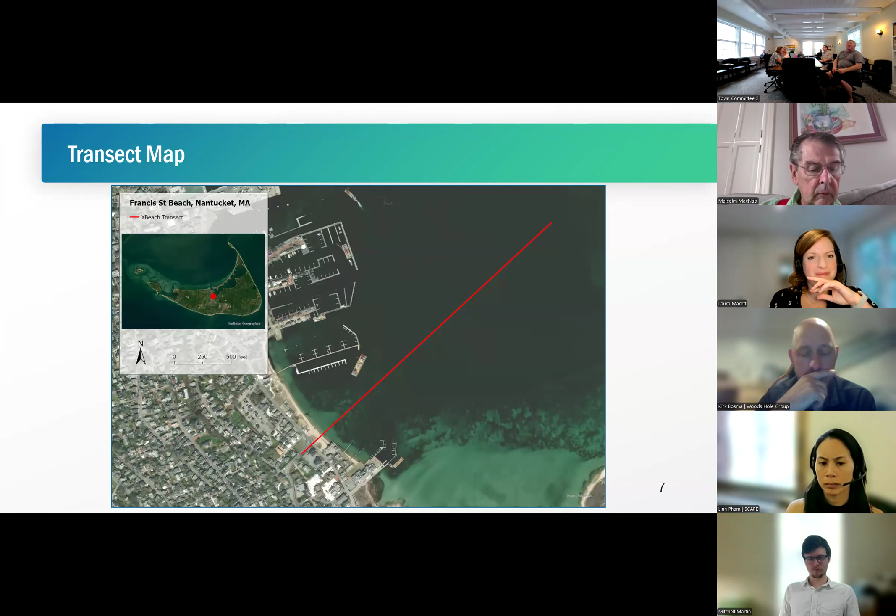To just talk about one of the things that Matt is saying, the scalloping within that part of the harbour, scalloping is closed. I think it's from Brant Point. I mean scouring. I meant scouring. I'm butchering the language. Worse than you. You're thinking of.

Worse than you, Vince. I'm sorry. All right. Okay, so this is supposed to animate, Laura, so we might have to switch over to me. Animated when I looked at it before. Oh, there we go. I just had to click.

Okay, yeah, great. All right, so this is what these kind of things look like. It's going slow, but the tides are going up and down. There's waves that are rolling in on top of this, which are a little harder to see at this scale. The top figure here is the existing conditions profile, so with no project in place; the bottom figure is with the project in place.

Along the horizontal axis is the cross-shore distance as you head off into the harbor to the right, and on the left, the backside, is Washington Street. This is a 2030 2-year storm event. Around simulation hour 100, you should have seen that the water level peaks and goes over the top of the existing conditions profile and floods the area behind it. And then in the proposed conditions, that's mitigated at this portion of the shoreline. So there you go. It just happened right there.

What this model also does, if you go to the next slide, is start to show what happens with the sand movement in this condition. There's a lot going on in these figures. Again, existing profile, no project in place, is the top. Project in place is the bottom figure. What you need to focus on is the initial layout of the profile, the black solid line there, and then the final profile, after the storm passes through, is the red profile.

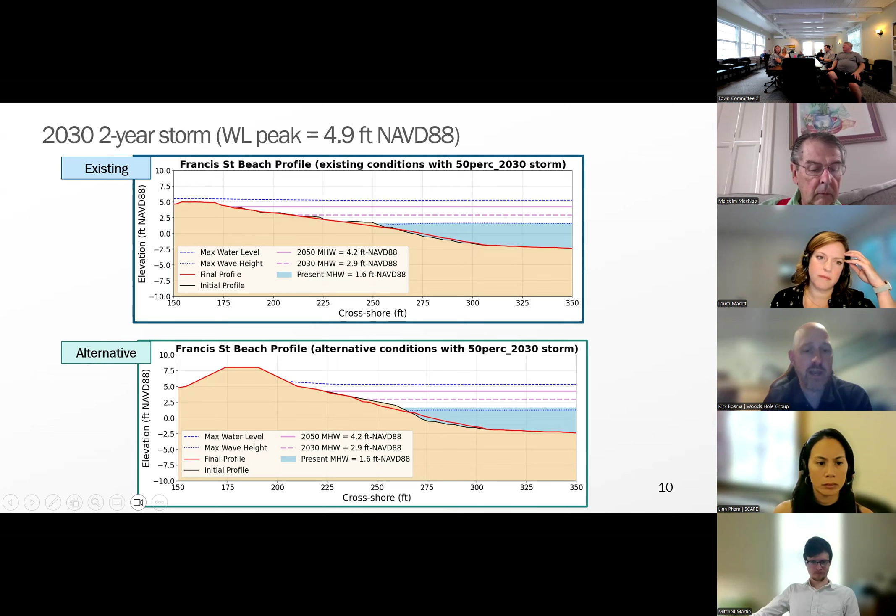The second thing you'll see, not necessarily in this storm event, is eventually sand that overwashes over the top and gets pushed back into the areas landward. We'll see that as we go through some of these bigger storm events. So you can go to the next slide. Now we're getting a little bit bigger here. This is a 10% storm in 2050, so a 10-year return period event.

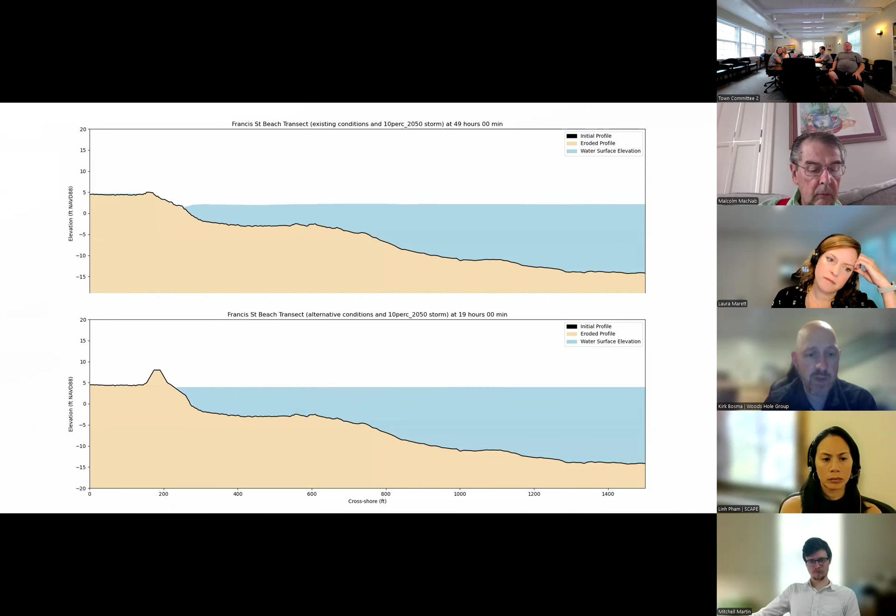And again, when we get to simulation hour 100 here coming up, you'll start to see the increases in water levels. And now what you saw there is you had overtopping of both the existing and the proposed scenario, right? Again, this isn't intended to necessarily mitigate against every storm event, but it's now flooding in both those cases. Next slide.

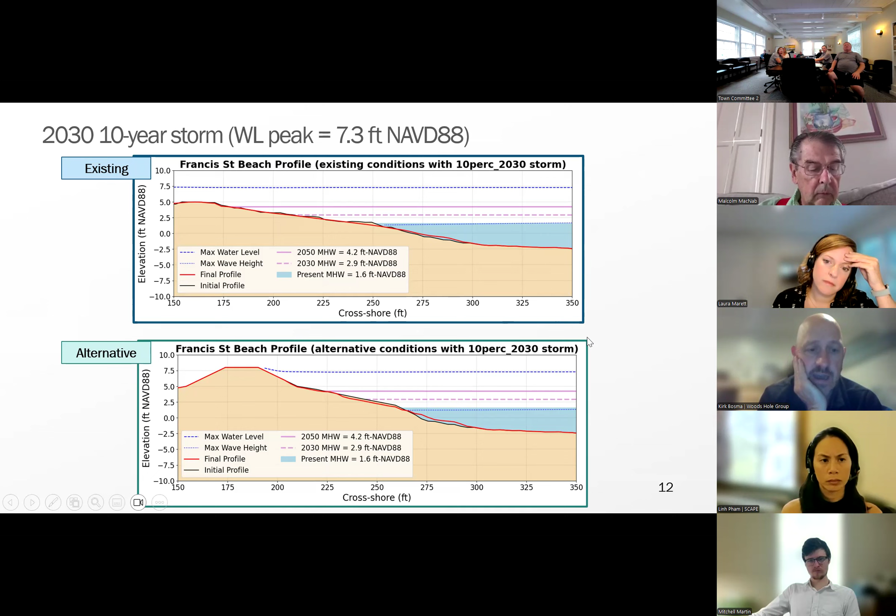And then we can start to unpack a little bit more what happens with the profile. Now, this is a relatively stable area, and we'll get back to that whole point of where sand moves alongshore and the scouring and all that kind of stuff. But generally, the existing or the proposed beach profile is really performing pretty well against these storm events. This is a 2030 storm event, sorry, not 2050. And it really is not eroding as much as you would think, which is actually a good thing. The next storm.

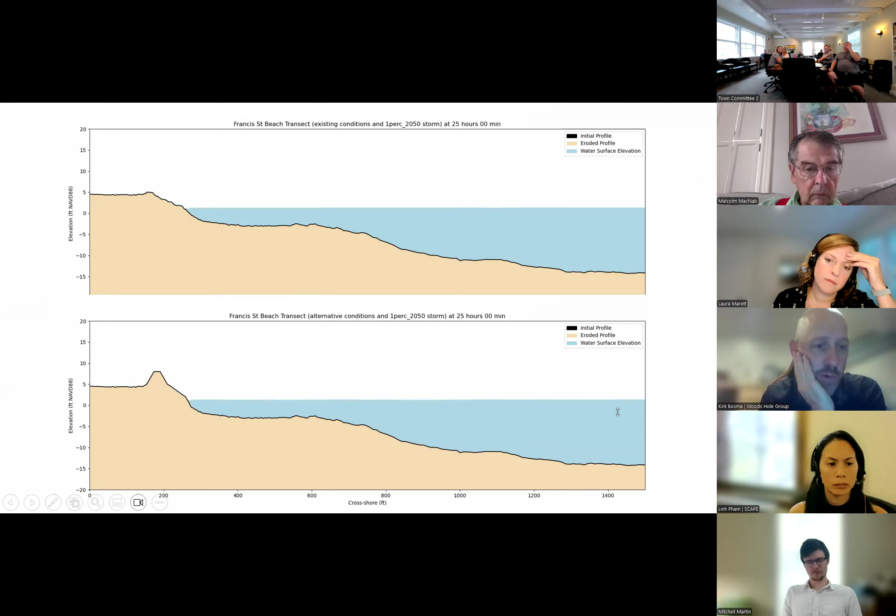And then here's a really, really big event. This is 2050, 100-year condition. This is the one that we really wanted to evaluate to see what was really going to happen with this profile. There's the passage of the event. You can see multiple tides cause problems and flooding on the existing profile there. In fact, if you look close, you can see standing water behind the dune under existing profiles of flooding. Next slide.

And so here's what we start to see, where you can actually see the sand built up behind under the existing profile there. It gets up over 5 feet. So we have over a foot of sand that's gotten pushed back into Washington Street and beyond in this scenario. The existing beach profile does start to chip into the dune a little bit more. But again, it's relatively stable due to the fact that we're not getting tremendous wave energy here.

And the design of the beach profile was such that we could try to break the wave energy before it gets to where the boardwalk infrastructure is. That doesn't mean that it's not flooding, right? So that blue dashed line you see at the top is the peak wave height, combined wave height water level. And that's getting over top of it, but we're not negatively damaging the dune itself that much because a lot of the energy is broken before it gets to that particular location, unlike existing conditions. Next slide.

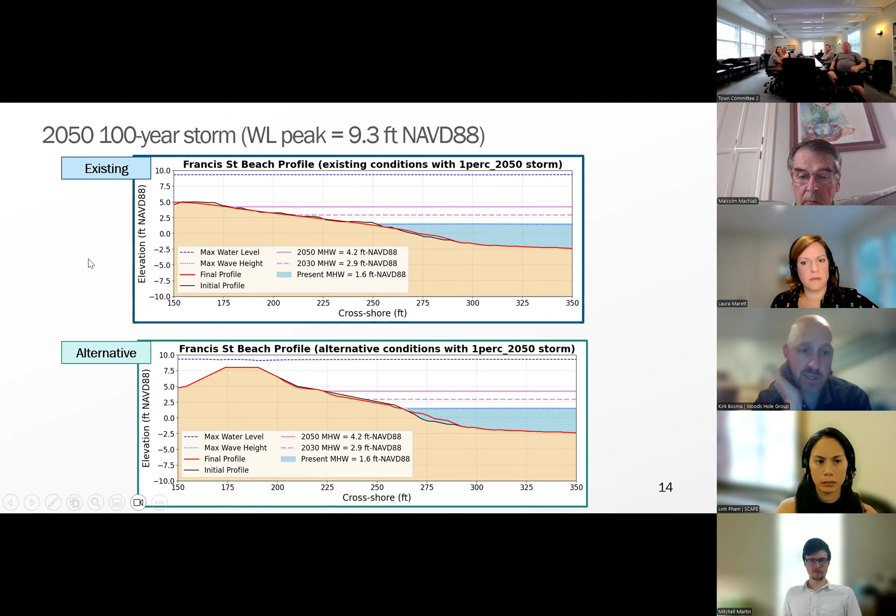So from this particular model, here's some of the key takeaways. And to go back to the question about what's happening, the figure that I'm showing here is long-term shoreline rates of change. And so black essentially means it's a really, really stable beach. Pink indicates very minor erosion, which is what's happening at Francis Street. Green indicates actually an accretion of value. So that means sand is building up there.

And then if you get into the darker reds and darker greens, that's where you have big change. So if you see a dark red, that's really significant erosion. You have major change in the shoreline and erosion happening in that location. So generally speaking, in Francis Street, we have some minor erosion, but it's not very significant. It's pretty mild. And then to the area just to the south with the harbor, we actually have a little bit of accretion in that area. So sand is getting pushed that way.

And generally, I would say because of the orientation of this, there's very little movement here. The wave energy isn't that strong on a day-to-day basis. But if you do get events, the sediment tends to diverge and get pushed both to the north and south out of the center. So that shape of the beach, which has that slight concave inward, is a good indication of how that sand moves in the longshore direction, meaning it's going to get pushed from the center, both out to the north and the south in this area.

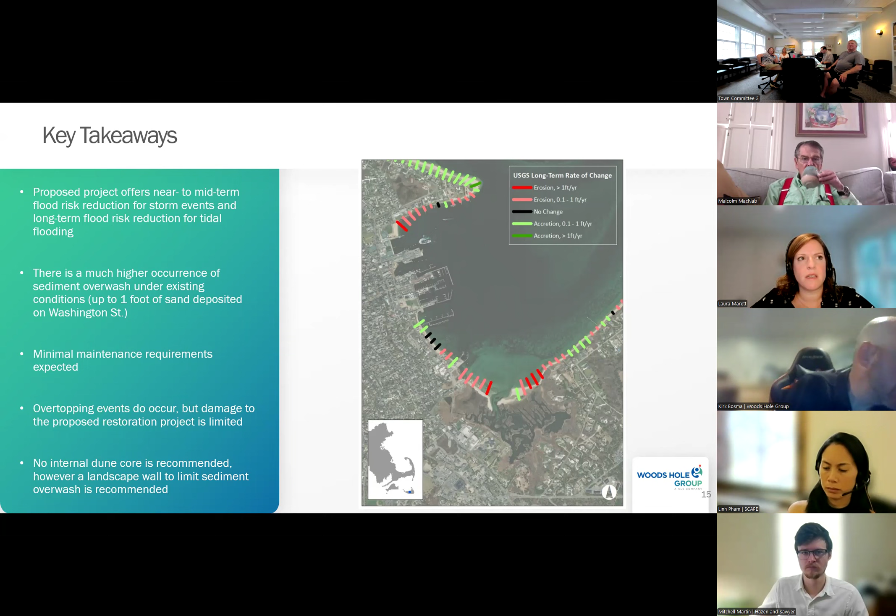I think in the public messaging, we can be really clear that, like, you're both right. Matt, we need to be clear that the water levels and the amount of flooding that we're seeing is changing. And this project is intended to address that while also creating a great space for people to access the water. But because we have seen these patterns of minimal erosion, we believe that the dune proposal will be successful and will withstand for a long time. So I think it's both.

Yeah, that's what I was going to say. It's really the difference between two processes, right? We have a stable beach setting in terms of the geomorphology, which means the way the sand moves and erosion occurs. But we have changing harbor and water level conditions on a regional scale that influence what's happening with flooding. And so there's change and not change, so to speak, in this whole project.

For the flooding models that you showed, when it does overtop the newly constructed dune, are you seeing a decrease in water depth on the other side? Yeah, so that's the second model, which is why I was trying to push through that before. Okay, sorry, Laura stopped us. Here's the second part, because they kind of go together. But just to real quick answer the other question.

The easterly winds. That's what produces all these events. That's pretty well known. That shows up in our bigger scale models like MCFRM. The real storms that produce problems at this location are due to those easterly winds. Whether it's driven by some cyclone type condition or just winds in general, nor'easters, that's all in that model. And that's how these storms really come into play. So yeah, it's a good point, and we've kind of vetted that out through this process. So that's in there.

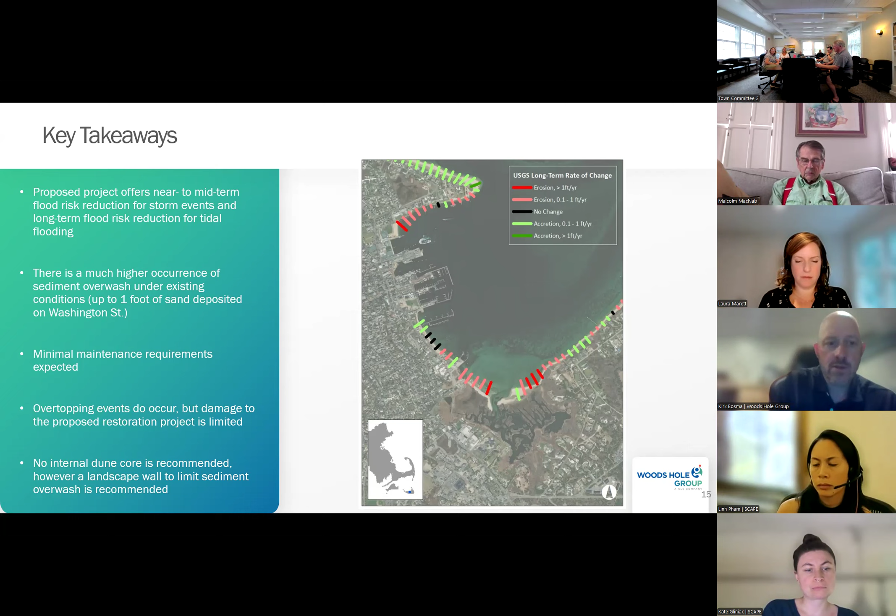Okay. We ready to keep going?

Yes. Okay, so the second piece of this is really then looking at what Leah was just getting at, which is, okay, what happens now with the project in place, whether it's beach overlook or dune swoop, with the water and the velocities that are induced through that storm process. So

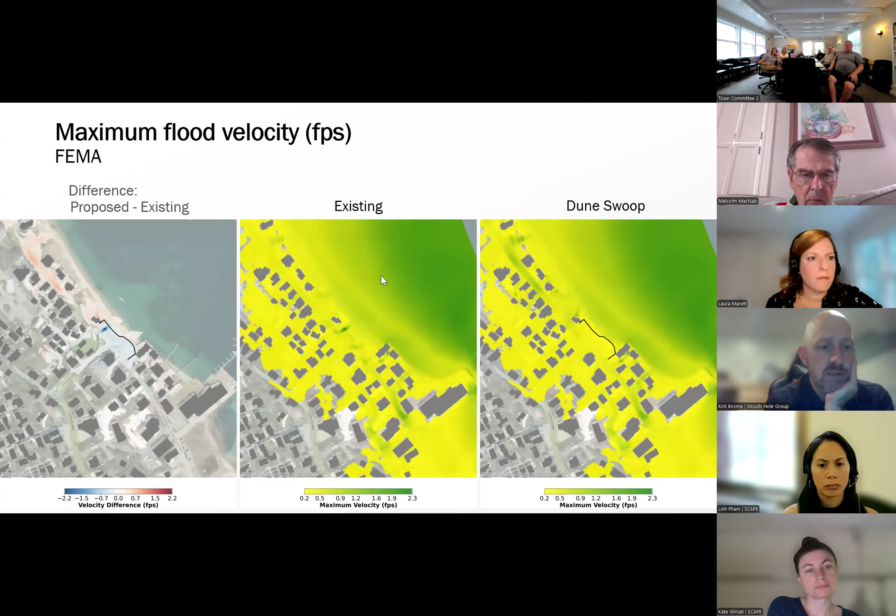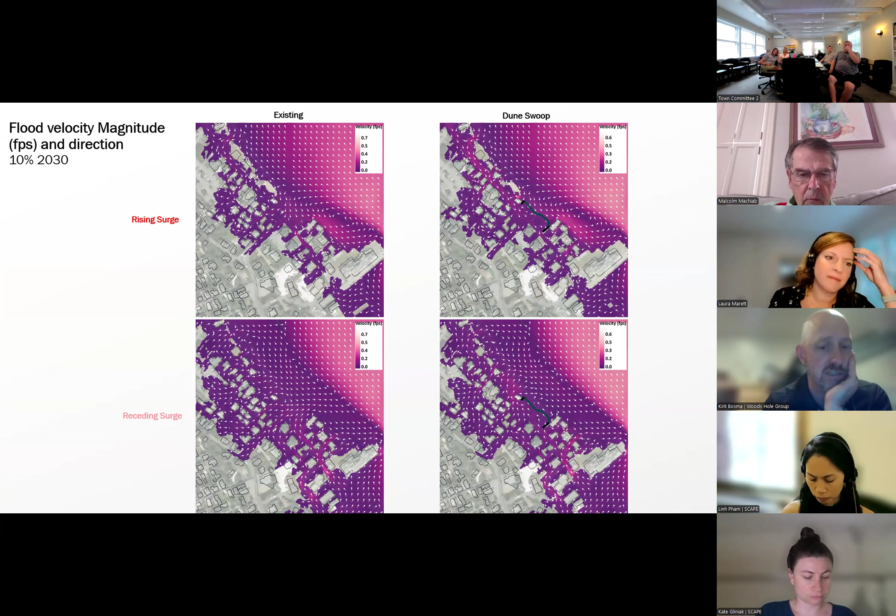And here we're getting really big. This is a 10-year storm in 2030. We're looking at how water goes around the project, what the velocities do. Again, we already vetted in the previous model what happens with erosion and how that changes the project itself. Next slide. And so here again, you see that same reduction in velocities and depths behind the structure or the project, and then increases in velocities down Washington Street. Next slide.

Kirk, can I ask you a quick question? You can. So this little green thing that we see in the existing is water moving very quickly through that pathway. Correct. Yeah. And when we see the blue here, we don't see that happening in the project. And then when we... Correct.

See the blue here, what we're saying is by putting in the project, we are slowing down or... You're eliminating, mitigating that movement, that jet of water that's coming through there. Yes. Okay, thank you. Yep.

Yep. So this, again, gets a little bit more into the regulatory stuff that you have to do to get these projects approved. But we looked at these 3 locations where we see changes in velocities at the project. And so 1, 2, and 3, you can ignore that one little building that's in there. I know that's gone. And so the table there shows between existing conditions and proposed conditions, what happens to the peak or the maximum velocity. So at point 1, it went from 0.3 feet per second, that's water flowing down Washington Street, and it increases to 0.9 with the project in place.

And that jet that Laura was just pointing out at point 2, it went from over a foot per second down to basically nothing. That 0.1 is just the water flowing down Washington Street behind it. And so it's a decrease in the velocity. And so we plot up where we see increases, which is point 1, and look at it relative to damage curves. So what these curves are in the figure to the bottom right are if you exceed these curves, meaning if you're up to the top or the top and right of this figure, that is going to mean you're going to have damage to the road, you're going to have scour, you're going to have damage to buildings. But you can see both our red and yellow, which is the increased velocity in proposed conditions, are well under all the curves, which means this is good.

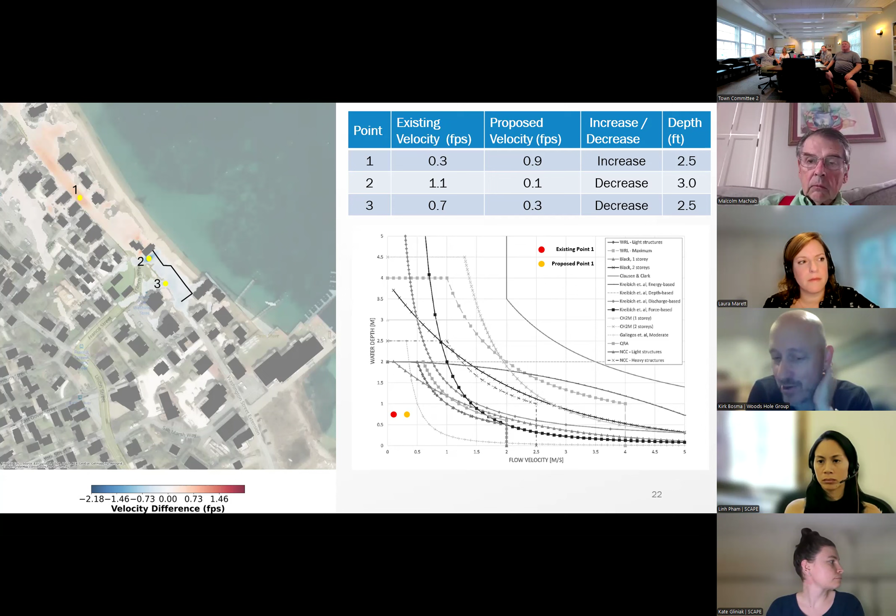Sorry, what threw me off was the table at the top was in feet and the graph is in meters. I know. So I was looking to make those track. They didn't. Sorry, that was my bad. That is not your bad. That's been a common complaint, but the data in that chart is very complicated. It's from a technical paper and I can't change it to feet. Yep. I totally get it.

Yeah, I was looking for tracking there. I can't believe you picked up on that looking at this slide for 30 seconds. You're not the only one that's picked up on that. So that's good. Wow. Right now, I'm fine.

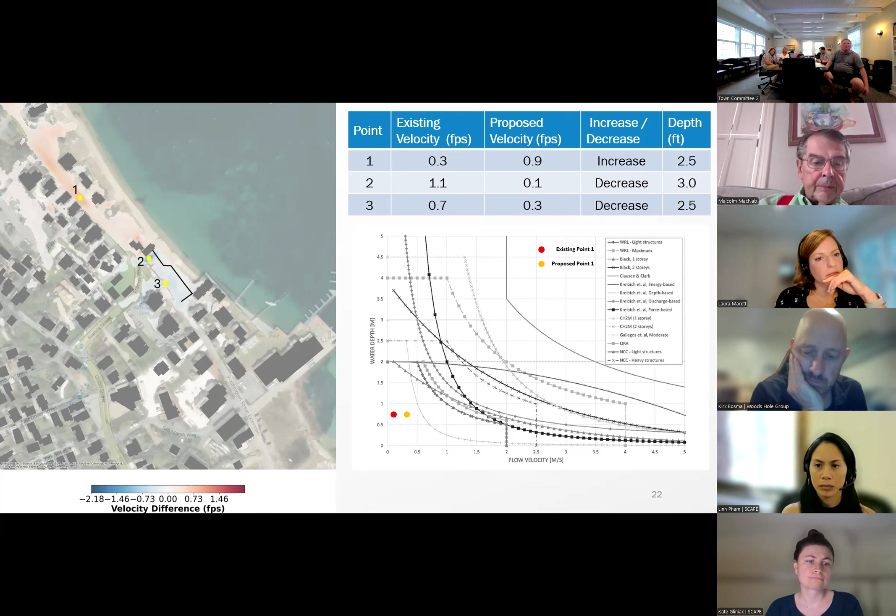Other questions? I don't want to spend a lot of time, and I don't know if this is a quick answer, about the vinyl bulkhead to the southeast of the beach where the kayaks are. Does the model show any effects of that vinyl bulkhead on our beach and our proposal here? You talking about that building? Yeah. Do you mean this existing bulkhead right here? Yes. Now that was put in not that long ago, so it doesn't really show historically how that installation is going to do. And then I'm wondering, it showed a lot of velocity in front of that on some of your mapping.

Yeah, you can see that it's increased velocity there. I don't know if you can interpret what we're looking at there, the increased velocity. Is that increased wave action? Could that be reflecting off of that bulkhead, scouring in the beach area? I know we're running out of time, but— Yeah, so I'll give you my quick take on that.

So maybe I'm not seeing it. I don't see significant increases in velocity. That light blue is actually a reduction there, and that light orange is very minor. You want to see those deeper colors. However, what I can tell you is when I look at waves, that vinyl bulkhead does redirect some wave energy into the project area that does increase or exacerbate erosion slightly.

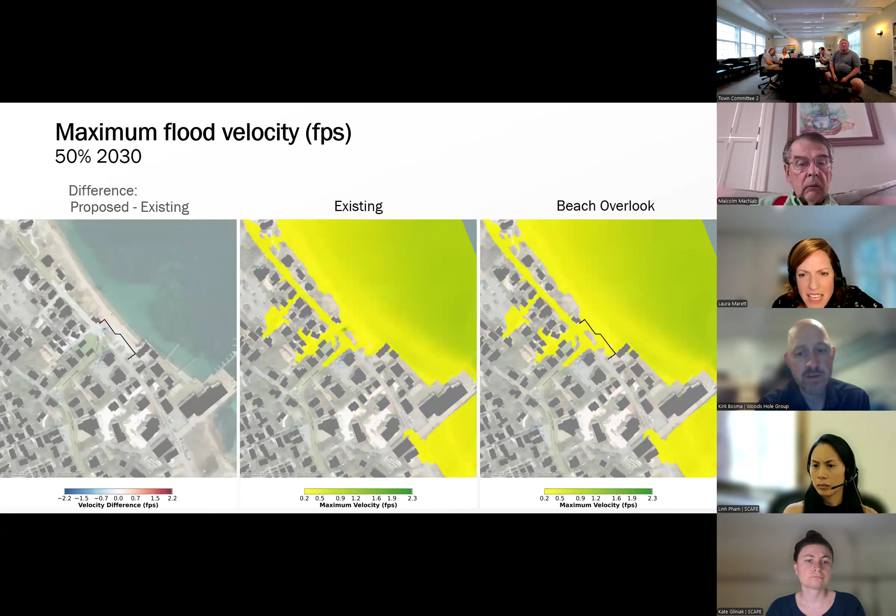Can we see that in any of these? You're not going to be able to see it in here because this is more about velocities, but I know that when I look at the wave velocity combination, that bulkhead you guys are referring to does, under a certain wave approach, reflect some energy. You can just imagine it's a corner, right? If you send a wave in from more the northeast, it bounces off that vinyl bulkhead and then into our proposed project area.

So it does cause some increased reflected wave energy in that corner, which isn't ideal. But you're not that concerned? I'm not concerned about the velocities for sure, because we cut that off with the connection there, which is why the connections are so important. I'm not overly concerned with the waves either, because the biggest waves are driven really strongly from the east direction.

And then it has less play. And what about scour? Scour from those waves, not that big of a concern? It's more of a concern than if it wasn't there, but it's not horrible from what we've seen. Okay, we can discuss it another time. Yeah, it takes a little bit different look than what I have here in these slides for sure. But it's a valid point.

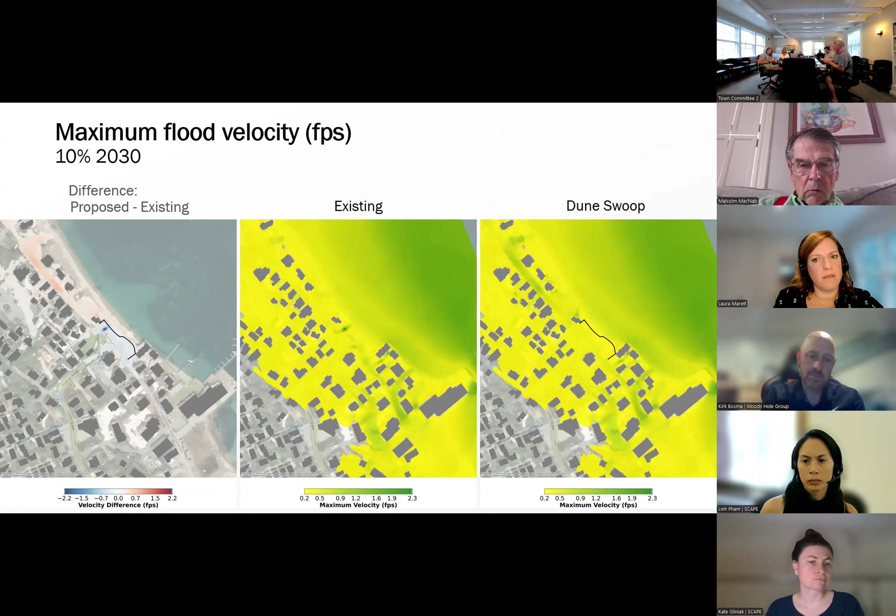Okay, thank you, Kirk. That was so clear. I want to make sure we get over to Hazen for stormwater modeling. Based on the recommendations here, our understanding is, and we're going to have to coordinate with Todd and the PAR team when he's back next week, that we're looking at probably not needing any kind of core treatment to the dune, which is good from a permitting standpoint, but the dune itself should be successful.

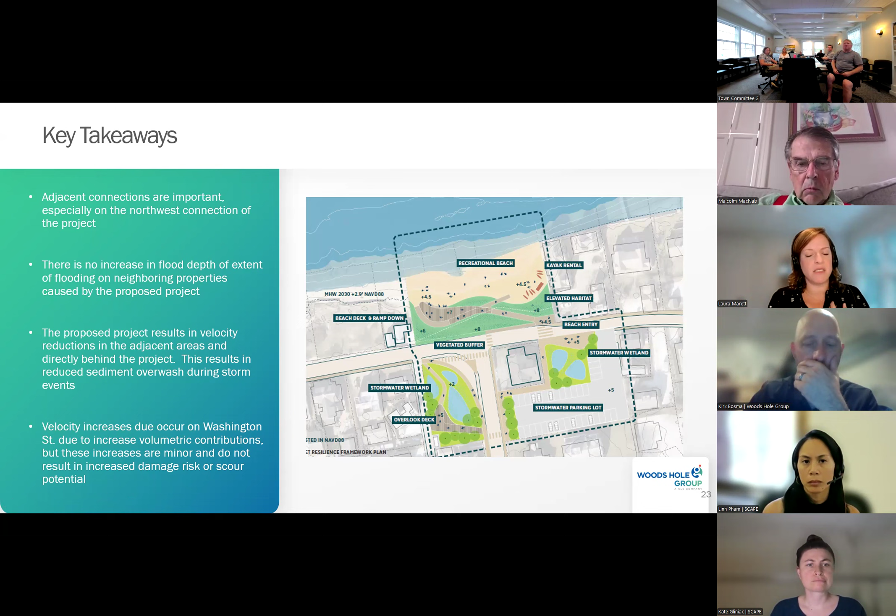But considering a landscape, small seat wall height wall that would just keep the sand from washing over Washington Street is our big takeaway here, as well as needing to prioritize the tie-ins, especially with the neighbor to the north. So yeah, if I can, Laura, just the four biggest points, and you hit three of them. Okay, what did I miss?

One is we're not recommending any kind of structural need inside the dune or seaward of the road. Okay, good. We are recommending, for overwash maintenance and general stability, and it does serve as a last line of defense, that landscape sitting wall on the backside adjacent to the road. Third, connections are important. And fourth, whether dune swoop or beach overlook doesn't really make a significant difference on our results, so you can choose whichever you prefer. Okay. Thanks for summarizing that.

That's awesome. So I'm not trying to argue with Kirk, I was trying to help our process through. Kirk used the phrase a low wall. Our historic preservation friends will not view that kindly. So if we can come up with a better descriptive term and say that we're open to whatever material it's constructed from, so that we don't collect opposition, that could be helpful. Like a seating bench or something like that, do you think that would be received more favorably?

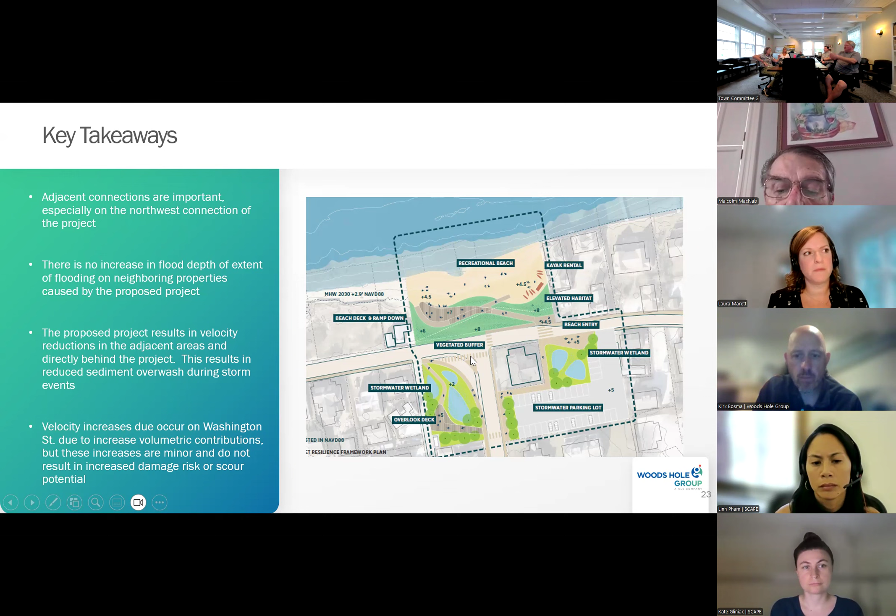We can say it can be made of wood, we can shingle it, we can do whatever. Okay, and we can look more at the material expression of that. You can ask them what would be historically appropriate. Exactly. Is it putting in poles along there like you see at the dock? They'll tell us. Yeah. I think we can pull from some of the vocabulary we see at Easy Street, the rough hewn benches, and we'll come back to you with more ideas about materials. Round timbers into the ground along the edges might mimic that.

Okay, are we ready to go to stormwater? We have about half an hour to get through this piece, and we have a few sketches we can get to as well. But so I'm going to turn it over to Ben and Mitch from Hazen. Do you guys want to drive, or you want me to click through? If you could do it, Laura, that'd be great. Okay, perfect. All right. Sounds good.

So yeah, just kind of an update on stormwater. We've been doing some modeling, and really what our goal was with this is to kind of characterize what the potential for flooding looks like under existing conditions, sort of in that red area, if you have rainfall during a high tide cycle. And then the other two things we wanted to look at are, how would that flooding be impacted by some potential modifications to the drainage system? And what is the potential for reducing that street flooding by installing some kind of green infrastructure or rain gardens in those roughly outlined orange areas?

So just kind of some background and overall context for what we did. And can I just remind everybody of one thing? What we're going to see today are the first two components, which is the existing condition and the potential for infrastructure improvements. We are not yet looking at the rain garden and the salt marsh center, because we're just sort of receiving direction on what to do in the parking lot here. So that's to come.

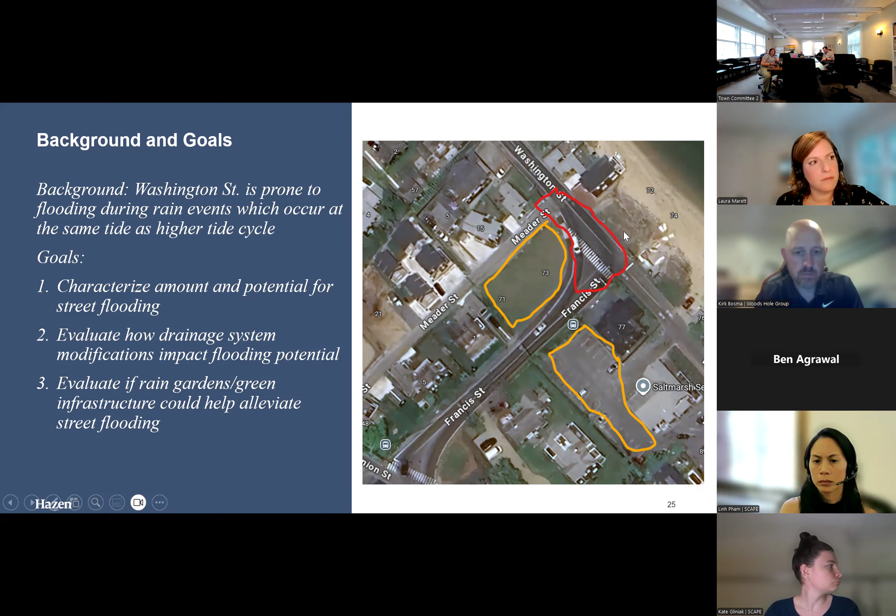Yeah, and actually, Laura, while we're on this slide, I'll just point out, when we're talking about the drainage system improvements, there are essentially in this area two existing outfalls, one on Meader Street, one on Francis Street. And we wanted to look at the potential to redirect flow from the Meader Street outfall to the Francis Street outfall, sort of from an O&M standpoint, one less outfall to deal with, and then look at, does that negatively impact things? Okay, thanks, Ben. Yeah.

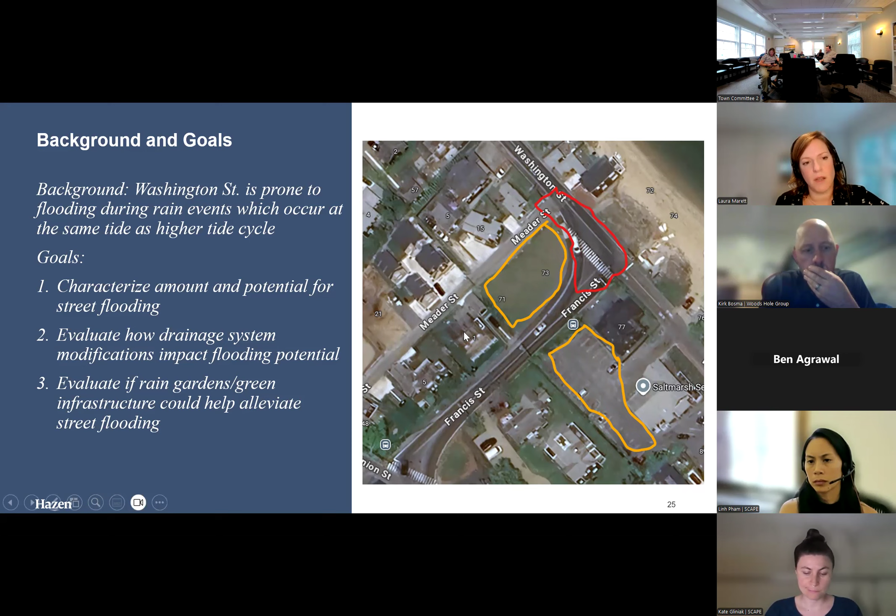So in terms of our approach for the stormwater modeling, for rainfall, we looked at some industry standard design storms, and that's called an SCS type 3 distribution. It's just a very normal approach for evaluating how stormwater infrastructure works under different conditions. The rain events we looked at were a 1-inch storm, a 3-inch storm, and a 5-inch storm. Those approximately correlate to a storm that you'd see once every 6 months. The 3-inch is something you'd expect approximately once per year. And the 5-inch is about once in every 10 years.

In terms of the coastal condition, we coordinated with Woods Hole Group and Kirk's team and looked at a present day tide condition, just as an initial screening effort. And really, as we all know, the drainage issues and flooding in this area are most likely to occur when you have intense rainfall at the same time as a high tide. So those are the conditions we looked at.

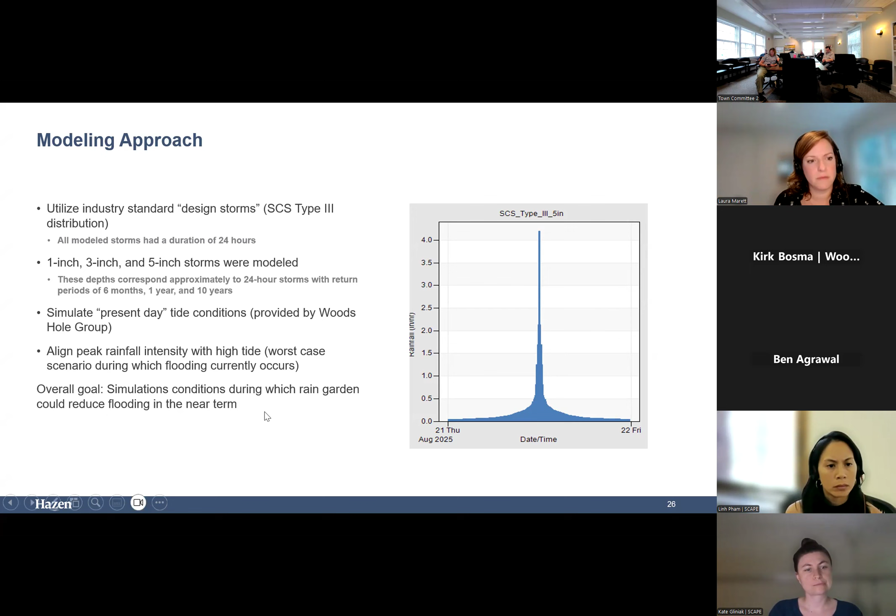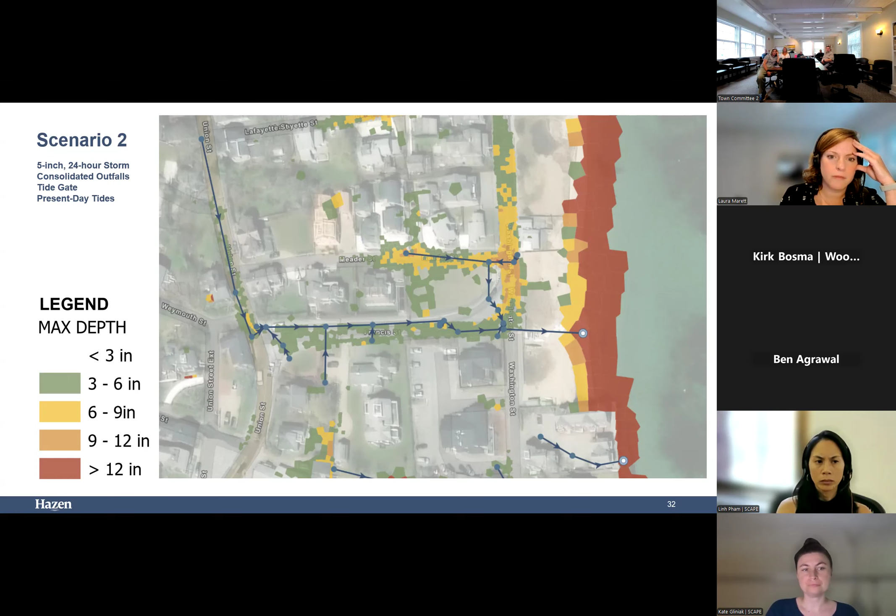And finally, looking at our biggest storm, you can see a similar pattern, just the amount of flooding on Washington Street continues to increase. And once you get into these larger storms where both of the outfalls are beyond their capacity, the outfall consolidation, removing the one on Meader Street, doesn't make as big of a difference. But we still think that, for the more common events, eliminating the outfall does have the potential to increase flooding on Washington and Meader Street.

So just some key takeaways at this point. Again, consolidating the outfalls and taking away the outfall on Meader Street does increase the potential for flooding if it's raining at or close to high tide. The amount of water ponding on the street, the scale of the flooding, is not huge. So therefore, we think that looking at the rain gardens and green infrastructure in those areas we looked at on the first slide is definitely worth pursuing further. And that's our next step from a modeling standpoint, redirecting that street flooding into a rain garden or some other kind of BMP and seeing how the flooding goes down.

And then finally, I think this is something that's been talked about quite a bit. More into the future, as the sea level continues to go up and the groundwater continues to go up, it may be worth looking to more extensive drainage improvements to augment the potential green infrastructure and rain gardens. So a quick update. That's great. Thanks, Ben.

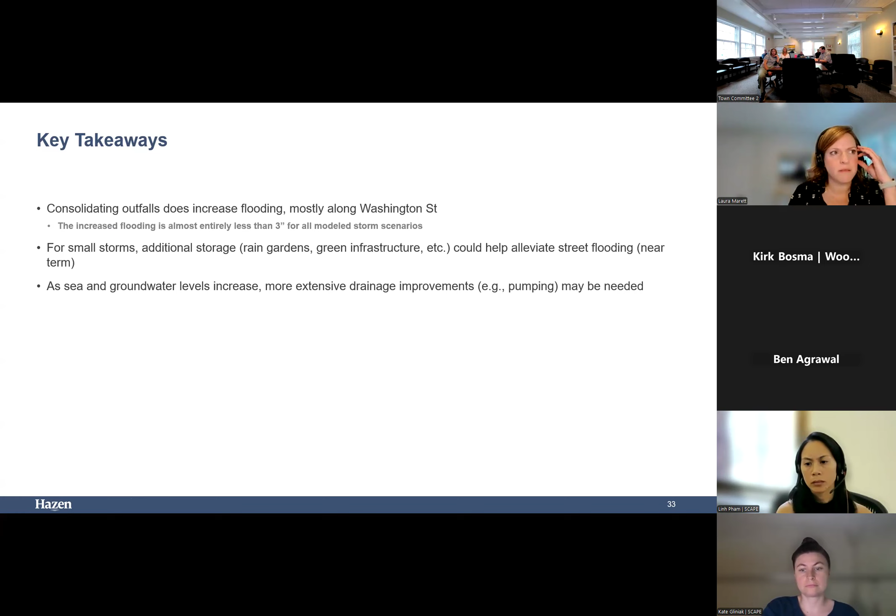No, that's good. I have a follow-up question. So I know we laid out these different scenarios. In scenario 1, let me just go back to the first one, you're showing the existing condition with no tide gate. And we're seeing that with the step of combining the two outfalls and introducing the tide gates, we're seeing additional flooding in these smaller storms. Do you have a sense from the modeling, if we just maintain these two outfalls but put tide gates, will that improve the condition?

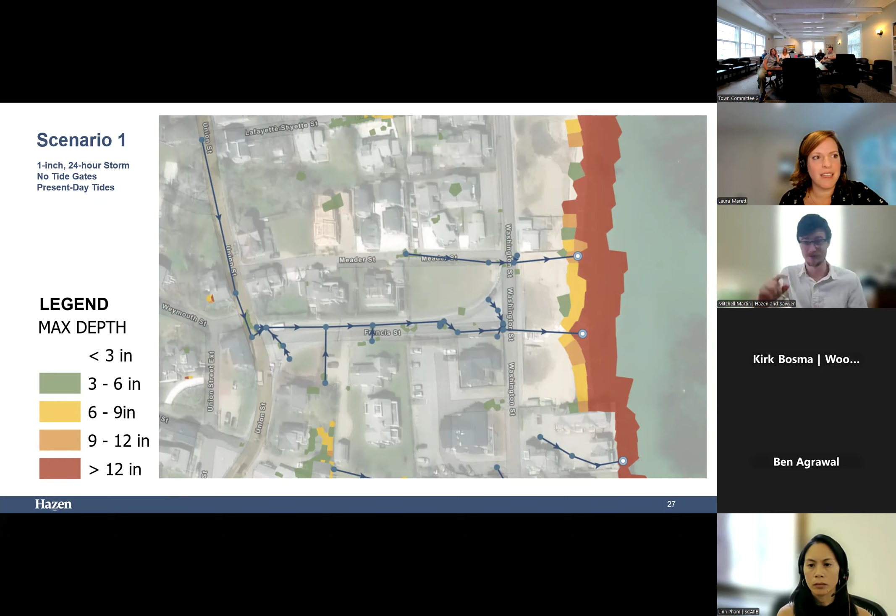We did model that scenario as well. Okay. What did you find? We found for these 3 scenarios it did not make a difference as compared to scenario 1. Really? But we should be very clear that that is not true for certain storm surge conditions, for certain future conditions, and for all storms. Right. So that's just the near term. The tide gates will make a larger impact in the future with sea level rise. So irrespective of rainfall, the tide gates will prevent the ocean from coming back through the outfalls and flooding the street. Okay, thank you. What questions do we have from the group?

Okay. Yep, go for it. Tide gates has never been brought up once. So what are we talking about with that? I don't think this has been said, but maybe I'm wrong. Yeah, we have been talking about it. So you're a little hard to hear now, but I think about the pipes with the flappers. Okay. You gotta be clear about that. I know what that is. All right, never mind. Okay, so, and this is for you, Dan.

Raising Washington Street, to add to your list of three things. Raising it, I don't know how much it should be raised. Six inches, eight inches. I don't think it needs to really go much higher than that. However, that has to be part of your discussion with this, in my opinion, as far as what improvement that creates versus just pretending that we're not doing it, because that road has got to get raised regardless whether this project happens or not.

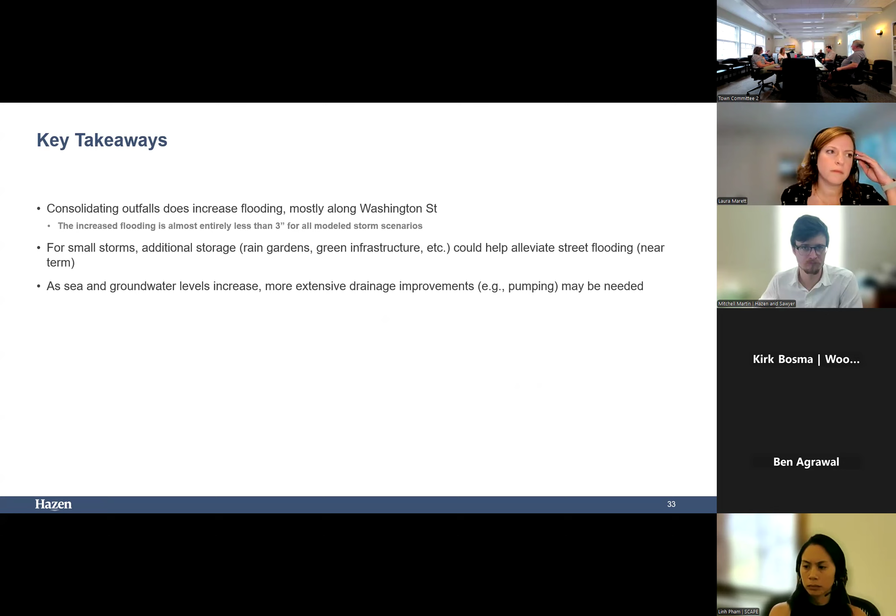If we dig that all up, we have to have a coordinated review. What are we doing? And I even think we should go as far as having some kind of a sketch engineering plan for the drainage, what it would look like, raising the catch basins, whatever we have to do to make that street higher than it is. Not a lot higher, just a little bit higher. The flooding is not that bad. It depends on the low spots. Like North Water Street, it only floods where it's low.

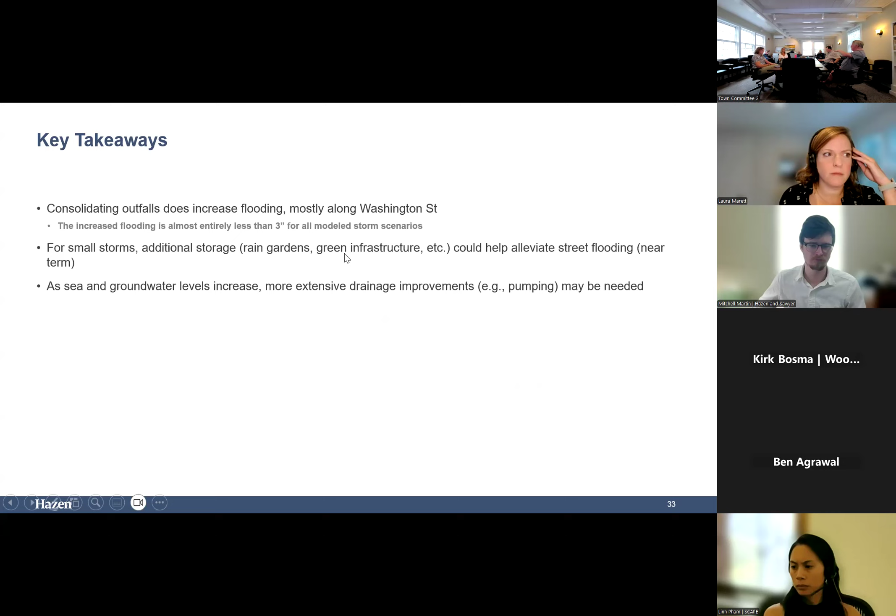There's some schematics in the coastal resiliency plan that show the roads with the conduits underneath, so that eventually, as something has to be raised, everything comes up together. So you don't have to do it twice. It shows it engineered and built that way in areas like this or down at Brant Point. So eventually we get to that. But do we get there, or do we bury it again? That's the question. Can't be doing stuff twice anymore. It's just too expensive and too ridiculous.

You sound like you're in favor of planning. With all this planning, Nat's become a planner through this process. He is, all right. No, it's common sense. We built two terminals without knowing what was coming one year later. Oh, I know. I've teased you about it.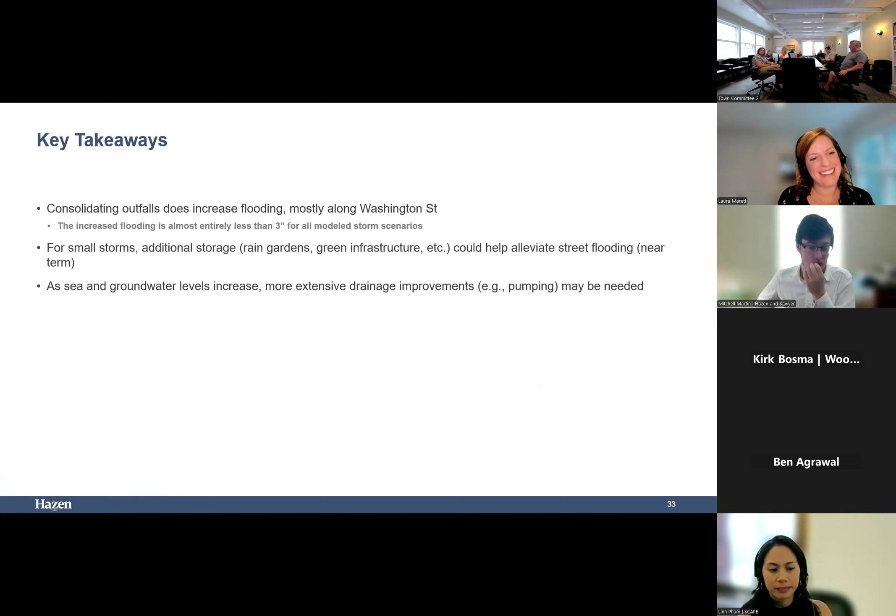I have a question about that. Consolidating the outfalls increases flooding. Is that because the outfall we're consolidating to, the pipe is not large enough? There's two main reasons. One is that the Francis Street outfall pipe is not big enough, and the other is that the lowest elevation Meader Street catch basin is lower than the lowest elevation Francis Street catch basin. So combining the two reduces the available pressure on the Francis Street side and allows flow to come out at that low elevation catch basin.

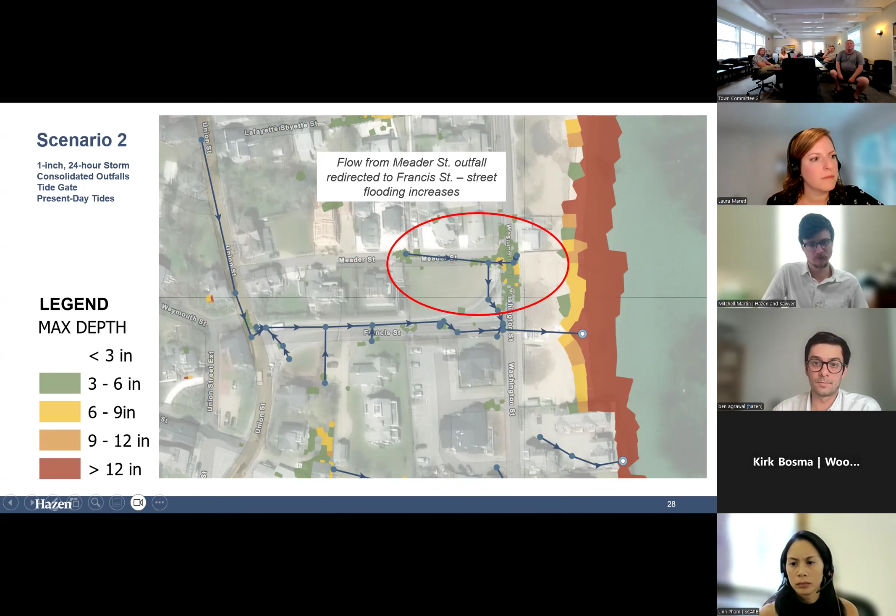Did you look at the reverse? If we didn't consolidate to Francis Street, but consolidated to Meader Street, would that be a better situation? They're both the same size outfall. So regardless of which outfall you get rid of, it's still gonna cause flooding on the road, most likely. What we'll look at is, with the rain garden implemented, if the situation improves at all, if that provides enough storage to alleviate that additional flooding. But from an existing condition standpoint, reducing two outfalls to one is more likely to cause street flooding.

And Ben, this is Charles, just to clarify what the assumption was in terms of the tide. This is all assuming high tide. So what elevation is that? 3 or something? So the difference in elevation is just not there to push the rainwater out. Exactly. That's the reason you need the two pipes or a bigger pipe, because you don't have the head differential to push the flow.

So is it conceivable that a small pump that just gives it that much more of a pressure differential could make the difference? It could. So we may not be looking at this huge pump station scenario. Maybe it's just a reservoir with a pump that can push it through these pipes, just give it a little bit more of a head differential.

Yeah, I think that's something we could definitely look at and, you know, worth evaluating. Hey, Ben, this is Kirk. Just one point of clarification on that, right? The tailwater condition you're using in the harbor still is a dynamic time series, meaning the tide goes up and down. Correct. It's not just set at a single high tide. You just aligned the peak of the SCS Type 3 with high tide. Yeah, exactly. Right. So rainfall is happening at the peak tide.

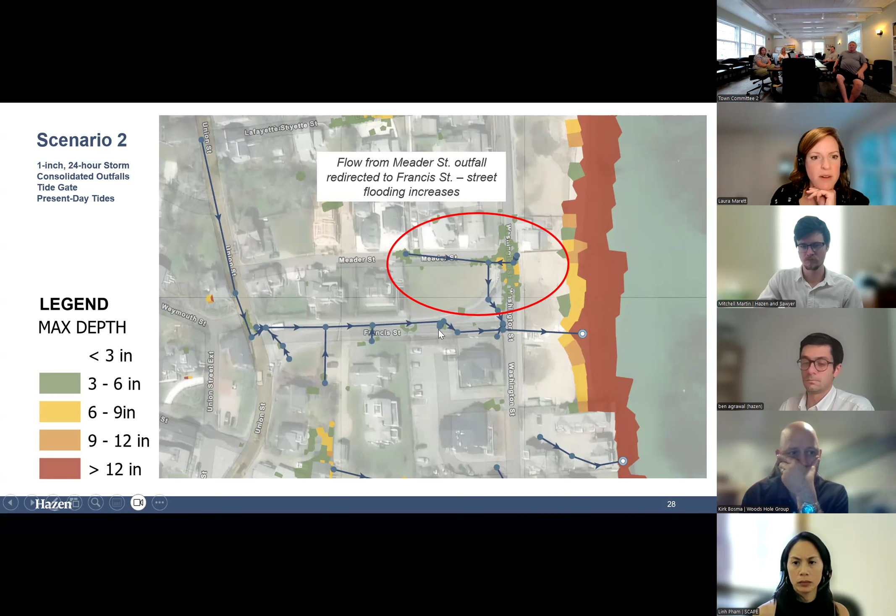Okay. Well, this is really helpful information as we're advancing the project. And I think what we'll be able to do with the next run is look at the introduction of the green infrastructure and understand how it can help mitigate the flooding that we're seeing in these models. The green infrastructure, both in Salt Marsh parking lot and... That's right. Yeah, and we can follow up maybe about the Salt Marsh parking lot and how many spaces we think we can lose to create more space for stormwater, but we could take that offline if you want, Leah.

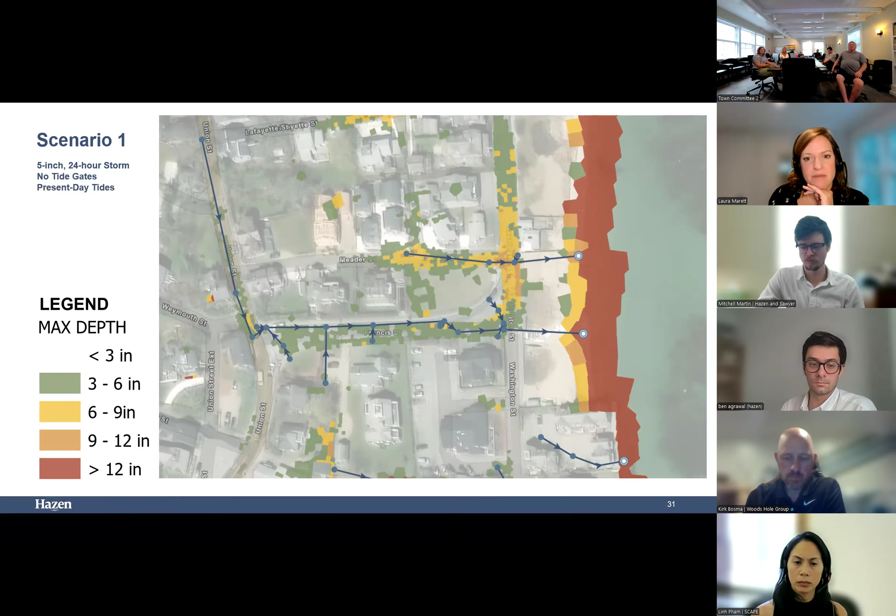I don't mean to interrupt because I had to leave for a second. I don't know what we talked about, but we talk about like the pipes, just gravity flowing, which has no motors, no things that have to be replaced, versus having some pump system collecting water to pump it wherever. That's a big deal, you know what I mean? Like to try to figure out what the right thing is. I just see that how do you maintain all these outfalls to not be clogged is going to be a process. You know what I mean?

I just think a long-term answer is something in that parking lot you've talked about. Or further down. Yeah, I know, but going down there from there, or however that's going to end up working. What about something at the bulkhead, getting some sort of an agreement with the people that own that building, finding a way to pump the water down to their bulkhead and out or something? Is that possible? Has anyone ever approached them, where the condos are?

They have an outfall in the bulkhead. They do? But that's their own. From the town? No. I'm just saying, is there some kind of negotiation that could work for something? We could approach them, but the thing is, it's a condo association, so you have to get all of the condo boards to approve. Okay, all right, forget it. No, I'm not saying it's impossible. No, but I deal with this every day, this kind of stuff. Whatever. Okay, I just thought I'd bring it up.

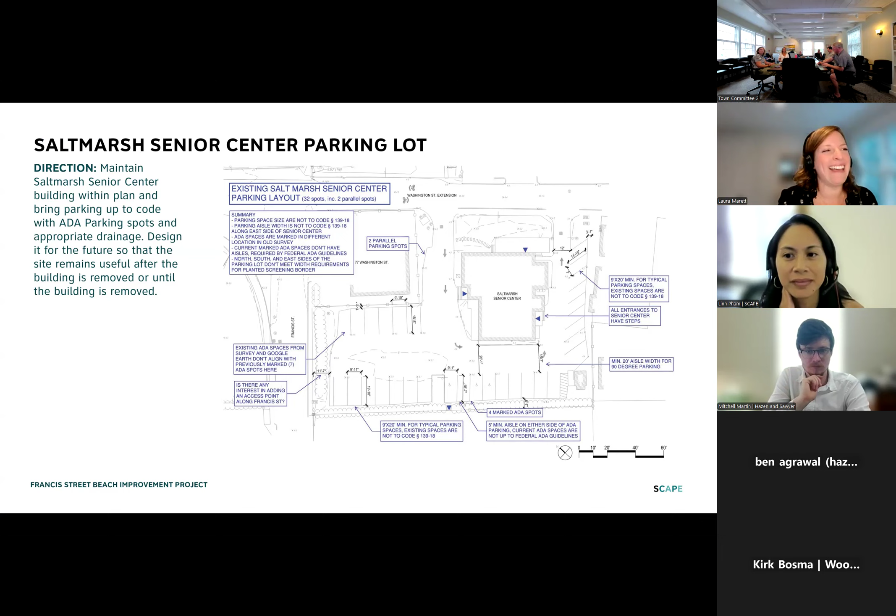Okay, we have a couple more slides. We have 5 minutes. So Linh, do you want to quickly tour us through these, and we can spend more time on them next week since we don't really have enough today? Sure. Did we want to move this conversation about the salt marsh offline, or should we discuss it here? I don't know, Leah, what do you think? What would be most productive? I think we can do it offline. Yeah, let the staff people that work for the town do that, Laura. That's fine, they know all about that. We will work through the nuances with Leah and Vince and the team. Okay. Do you want to talk about this section, Linh?

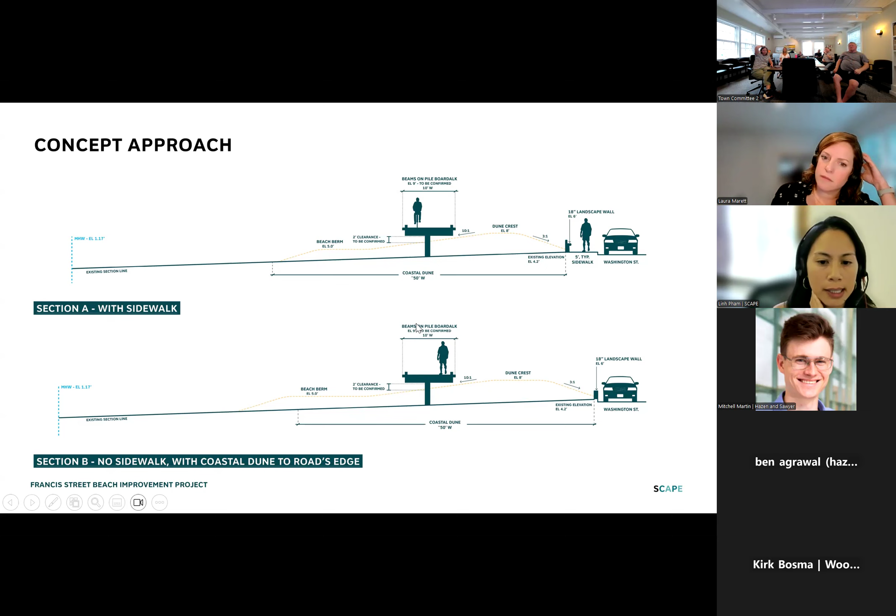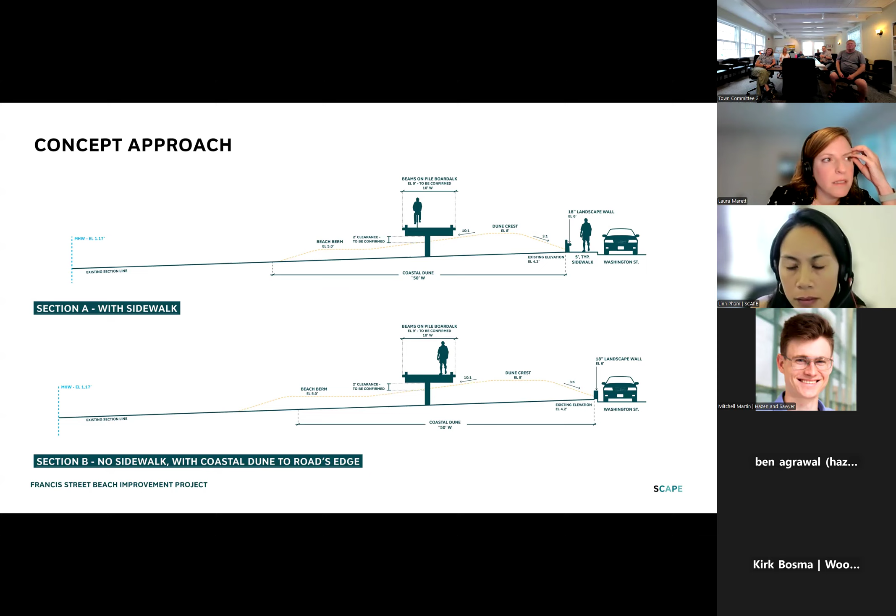I think some takeaways that we're seeing in here, as we looked in the plan before, the delineation and the dune itself may... One second, please. Yes, please, Rachel. Go back one slide, Vince has a question. Oh, yeah, sorry. Thank you. So this is kind of an important question, and I hate to bring up difficult things. Where you have the sidewalk under section A, is that right up to where the grass line is? There's a reason I'm asking, because the current condition is a multi-use path on the side of the road for cyclists, walkers, all that kind of stuff. Yep, this is what we're calling the sidewalk. It's a shoulder today. Exactly.

But that's actually quite important for another thing, for the turning radiuses of trucks coming down Francis Street so they can go up Washington Street. They actually have to get their nose in there from time to time. That was done on purpose for that. Guess who asked to have that done? Oh, it was you. Yep. Okay. That's really good to know, Vince.

Sorry. That got done before she left. My dad's a truck driver. It's a true story. I had to learn how to drive articulated trucks, and I said, I know how they're swinging that. They have to get in there.

Yep. And when we spoke to Mike Burns, he said to keep that sidewalk, or whatever we're gonna call it, where it is. It's not really a sidewalk. Right. But since we fixed the intersection that never got fixed, that has made it less important. That was done so the trailer wheels didn't cross over. Oh, but now we have the bigger turning radius. Cutting the corner has made that less necessary than it was. But today it's still necessary. Someone coming down Francis to go onto Washington still has to turn all the way. I would consider that a sidewalk, sort of mirroring what could happen. That's okay to do, in my view. You certainly don't want to put benches on it. No.

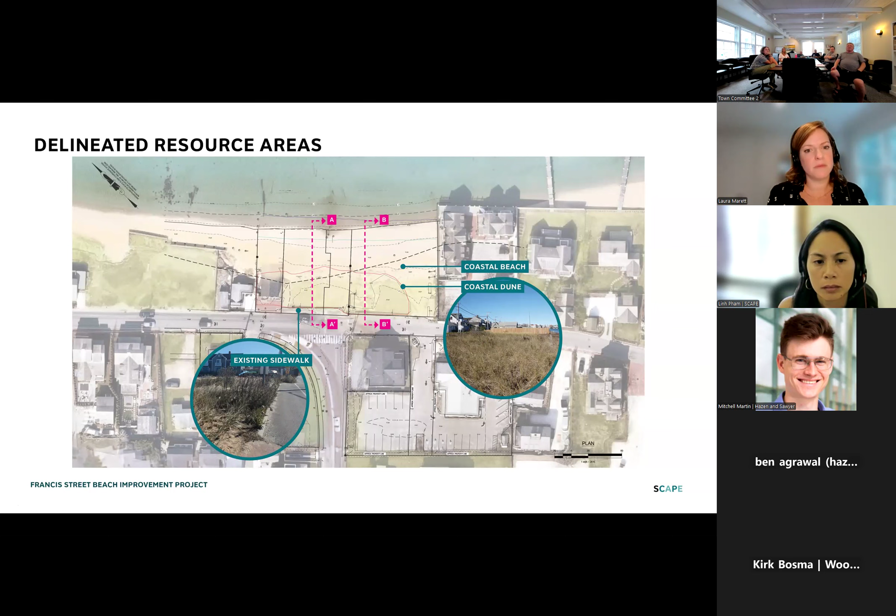So I think these are all things that we can solve. We're going to need to look at some tweaks to the approach. This is reminding me of Wynn Street, Matt. There's no real perfect answer. So anyway, I know we're past time. I want to be respectful of everyone's time. We had a lot to talk about, and we have a lot to talk about next week. So next steps, you're going to hear from PAR's team about more of the development of the structural ideas for next week, and then we can talk more about how we proceed with the form of the boardwalk that we're going to develop further.